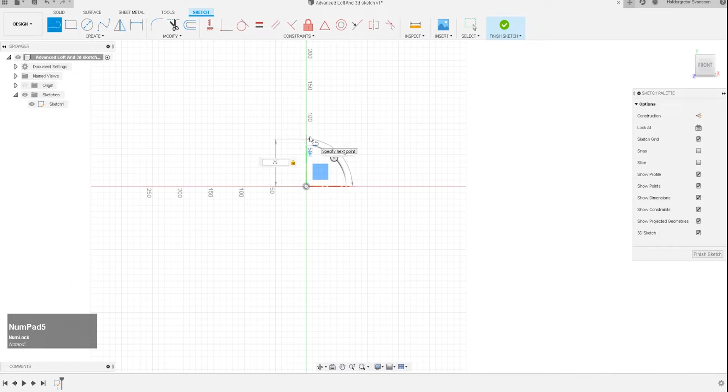So let's do something like that, 75. And make sure you have the 3D sketch on. Cannot forget to tell you that. Alright, now we have this line. We are going to select the center diameter circle and we are going to click on this gizmo here. Like you can see, you get this when you're using the 3D sketch. So I'm going to drag it out and choose 60.

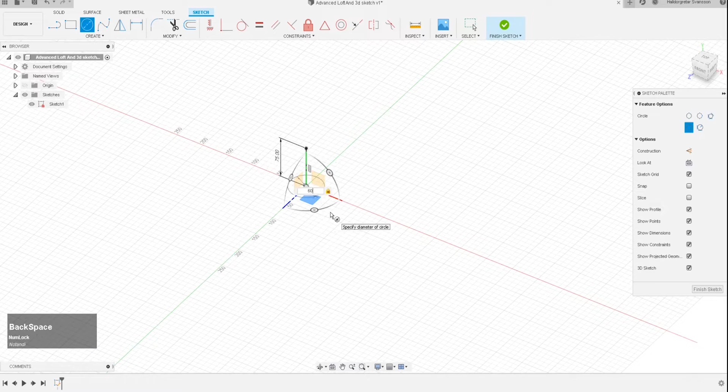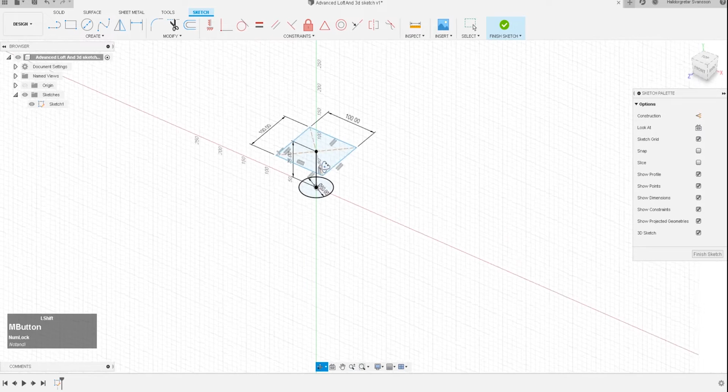From there I will go to create rectangle, center rectangle, choose the top plane and write 100 times 100 millimeters. From there we have to make some guidelines. So we're gonna click construction, line, and make sure we are on the front plane. We're gonna click here and then here, and again make sure that we are on the front. We are gonna right click and press OK.

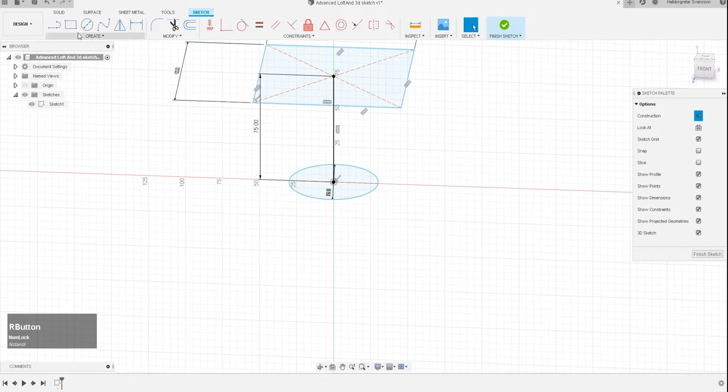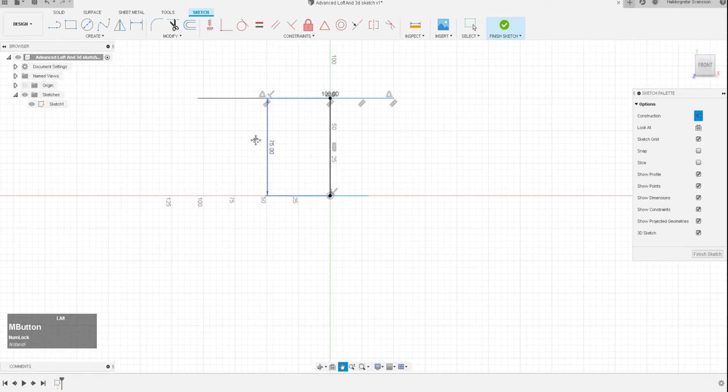Let's do it again. Up here, line and line, and right click and OK. Okay, now we have this one. So we will have to go to the front view, select the line again, and we can see now it is snapping here, and this is because we were drawing everything in the front.

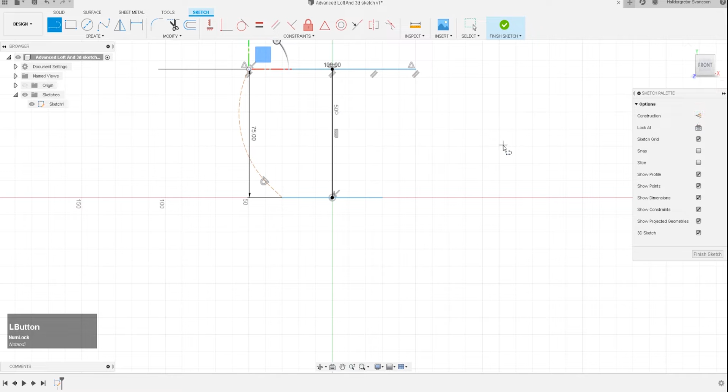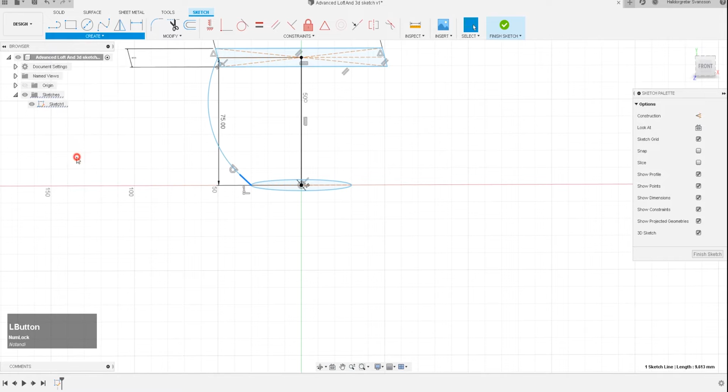So I'm gonna click and click again, and then I'm gonna click and hold, and I actually had the construction line on, so I'm gonna go to select, take this off. All right. Okay, next up, let's mirror it. We are still inside of the sketch, so we are gonna go to mirror. We're gonna select the line and then we're gonna select the mirror line. From there we can do OK.

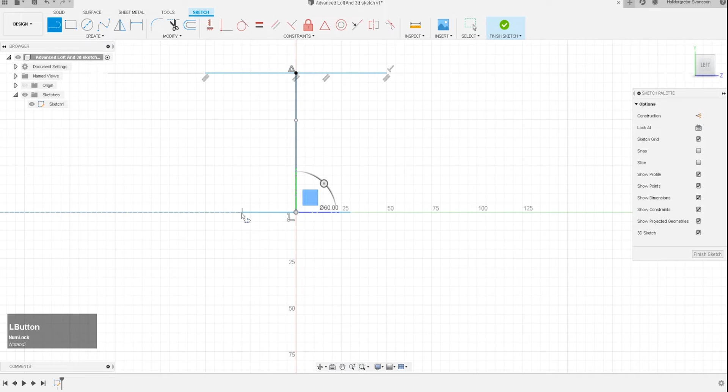Okay, let's say we are gonna do the other side, and let's say for some reason it just doesn't work, you know, to sketch the 3D sketch. For example, if we would try to do it here, it cannot snap because first of all we don't have the lines over here, and sometimes it just doesn't work because 3D sketch is not super reliable. So I'm gonna show you how you could do that. So let's go to finish sketch.

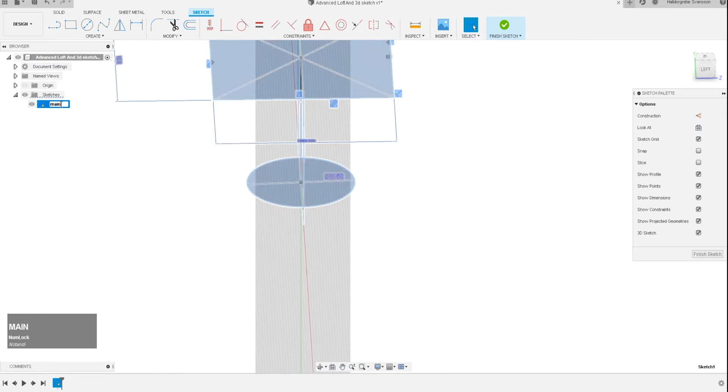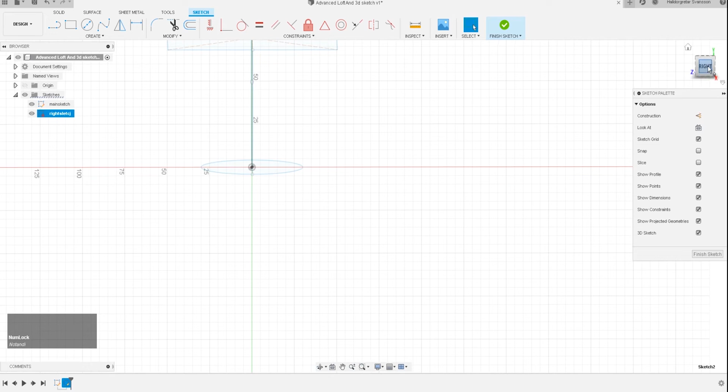We are going to just rename this sketch, just main sketch, something like that. And now let's go to the right side. And let's just finish the sketch. Let's go and create a new sketch, and choose the right side. And we are going to rename it right sketch. Alright, from there we're on the right side and we create a sketch on the right side. So from there we are inside the sketch.

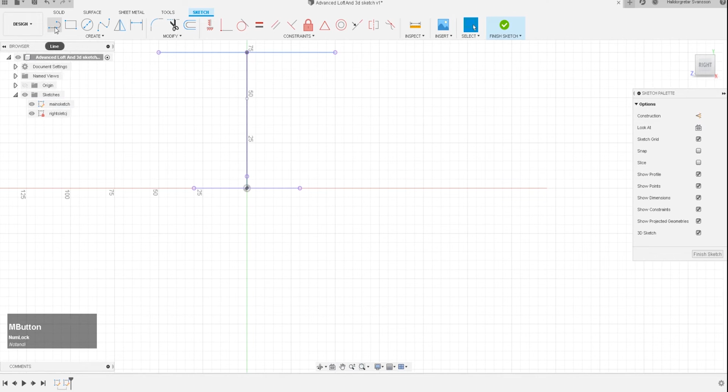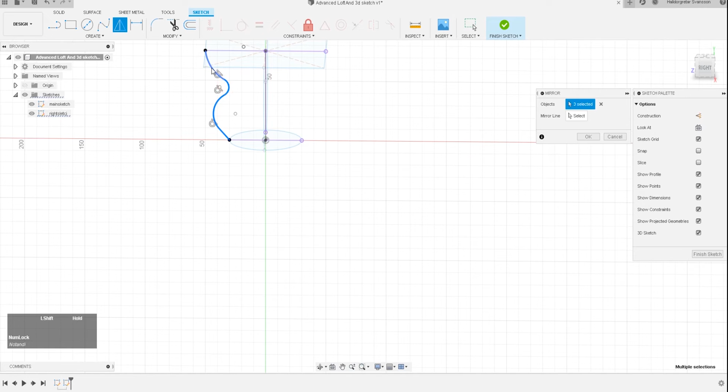We can go to create and project, and we're going to select the project and we're going to select all of these guys, and then we're going to press OK, and then we can go to the line and do the same as we did before. We can maybe try to make it a little bit interesting looking. Yeah, it looks very interesting. And create a mirror. Select all of them. Select the mirror line. Okay. Alright. So I'm gonna just do the finish sketch. So now we have these interesting sketches all over the place.

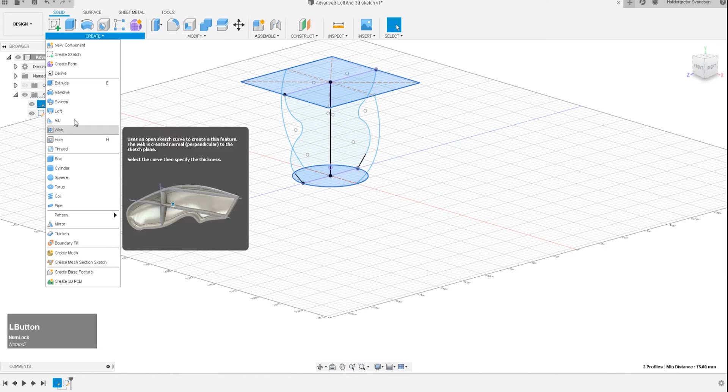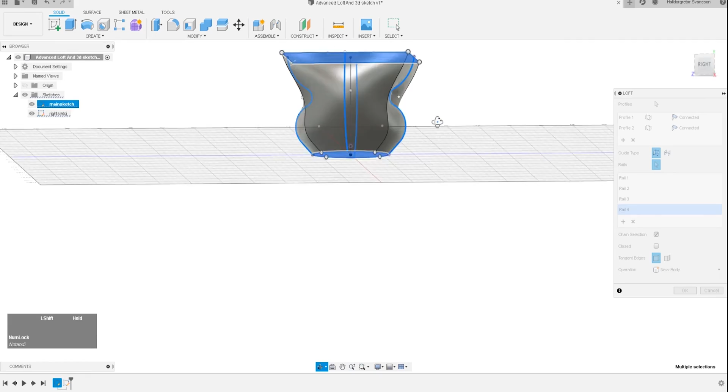And now I wanna loft it. So usually you would just go to select this and then you would loft it, and then you would just mess with this to make it different. But now we want to use these so-called rails. So we can just select the rail, we can click, and then we can click this one, and this one, and this one, and you can see it is following exactly the lines, getting this interesting shape.

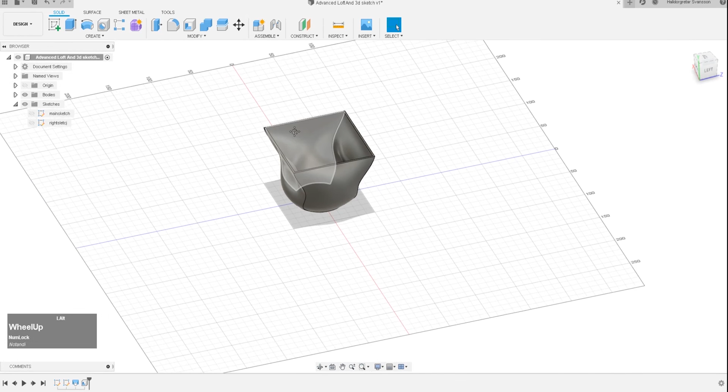So okay, it's maybe not the most beautiful bowl in the world, but I kinda like it. Can maybe shell it and make it a little bit small and make it 2 millimeters, and yeah. So this is how you use 3D Sketch and more advanced loft features.